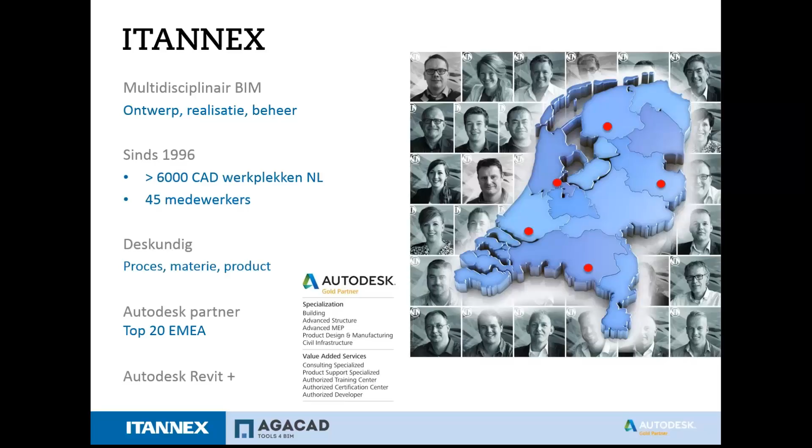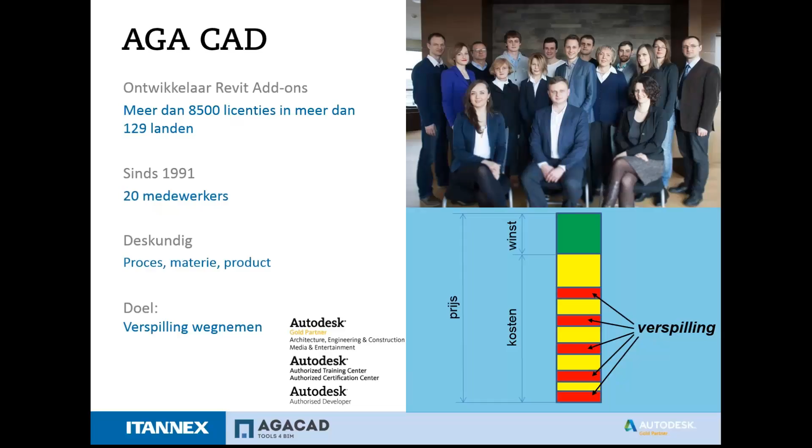AGACAD is een ontwikkelaar van Revit add-ons met meer dan 8500 licenties in meer dan 129 landen. AGA bestaat sinds 1991 en heeft meer dan 20 werknemers. Het doel van AGA is ervoor te zorgen dat u als gebruiker meer winst haalt uit uw workflow. Hiermee wordt ingezet op het versnellen van het proces en het wegnemen van verspillingen.

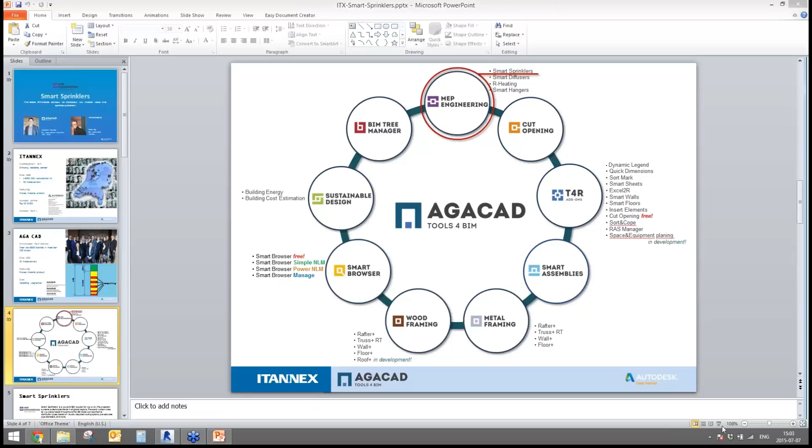Hello everybody, my name is Jacob, as Peter described me. So today we will speak about the fire protection design in Revit, and we will speak about the solution that is named Smart Sprinklers. As well, we have a lot of different stuff for diffusers, like for ventilation systems, heating systems, hangers, just from MEP side.

As well, we have the cut opening for cutting openings around the MEP line based elements where they meet something like walls, floors, and so on. As well, we have simple little tools that can increase your work productivity. As well, we have stuff for structural engineers, for wooden construction, metal constructions, and so on.

As well, we have the smart browser for browsing the libraries and inserting some kind of information inside of each family, not going one by one, but you can do that batched and so on. We have a sustainable design solution for calculation of heating and cooling loads and so on. As well, we have the BIM tree manager that can help you to manage your families inside of the project, not in your libraries.

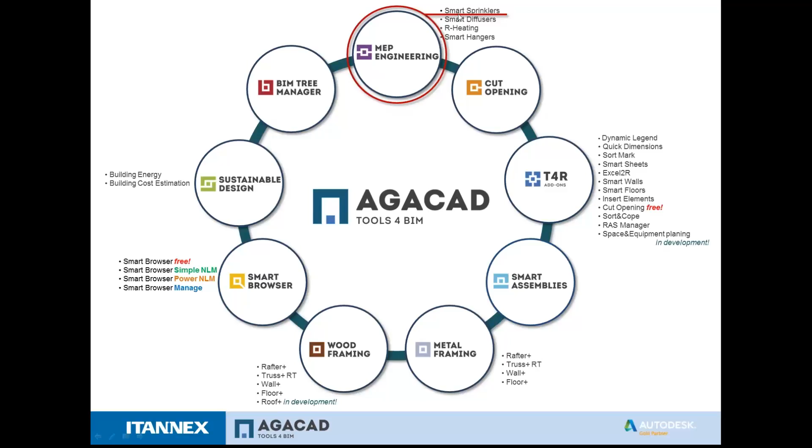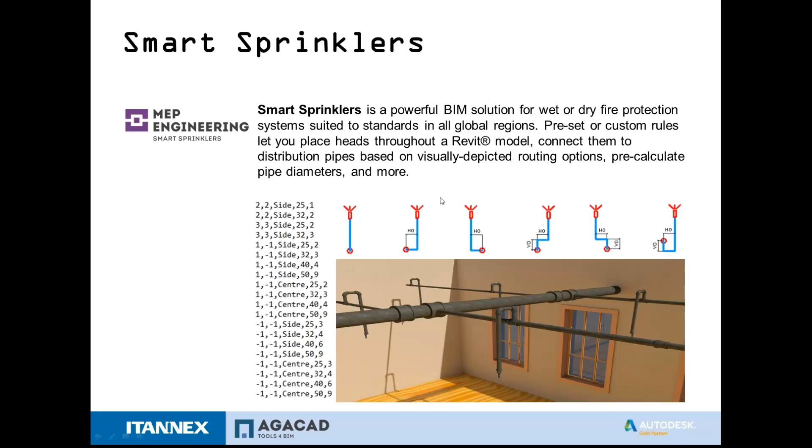So I just want to go to my Revit and try to describe everything to you straightly from my Revit. So what do I have here? I just have a simple Revit. So I want to make sure that our solutions work from the very beginning to the very end of your projects, and you do not need to do a lot of hard stuff to make configurations and so on. So I just simply open the mechanical template that is straightly in my Revit. And as you can see here, just on the right side, you can find the Tools 4 BIM Dock, and I will show everything from here.

So at the very beginning, what smart sprinklers can do is insert position symbols as a virtual group, and after that insert the real sprinklers to those position symbols. That means you can distribute your sprinkler elements in various geometries of the spaces.

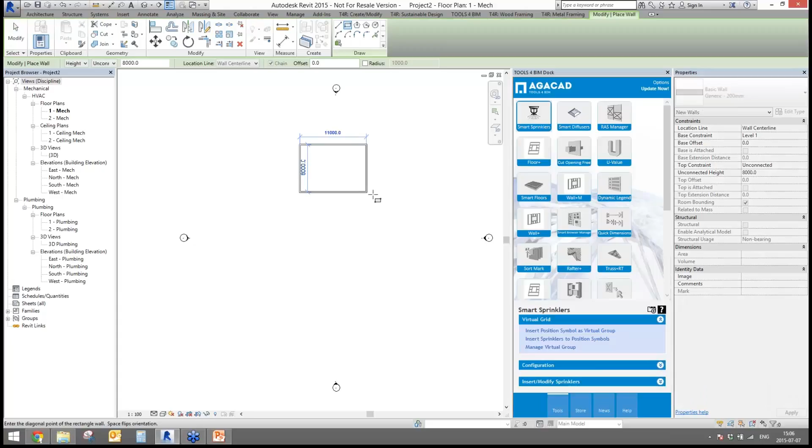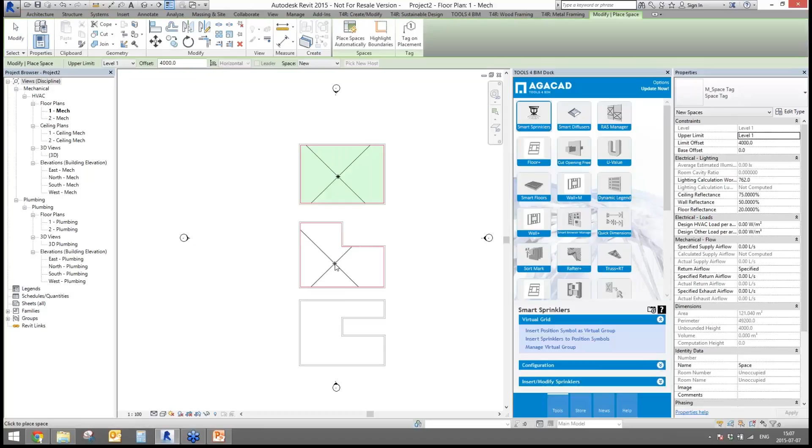For example, if I take the wall and draw something like a space right here, and another with different boundaries, different geometries, different space geometries. So for example, I have such geometries of the spaces.

I will just simply place the spaces inside of these premises, and go to the first step of the smart sprinkler solution. I will insert position symbols as a virtual group that will describe the connectivity between the real sprinkler and the space.

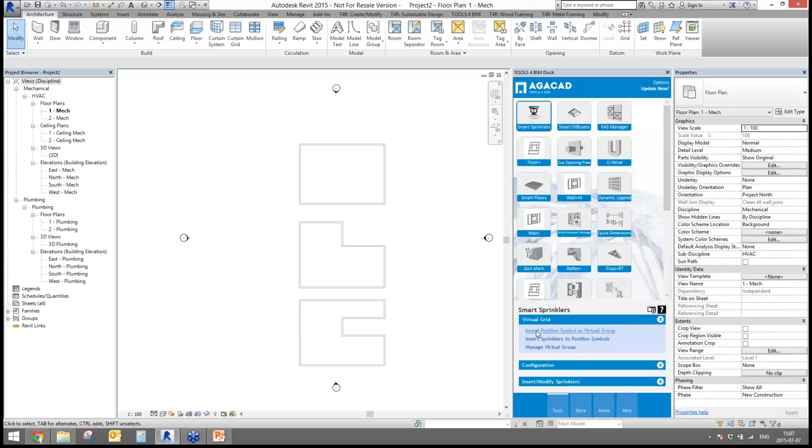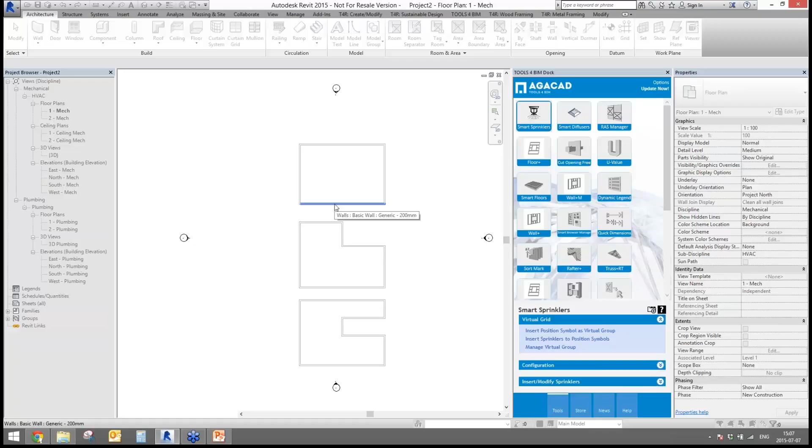After you click insert position symbol here as a virtual group, you have to click on something inside of the space. I will click right on the space, and the second click will show you where to find the x-axis according to which you will distribute all your sprinklers. I will take this one.

So here we have two very simple position marks, like symbols, that I will work with. I have a planning position mark for pendant sprinkler, so I will take this one, and here I have a really simple dialog box where you can find the length on X and Y directions.

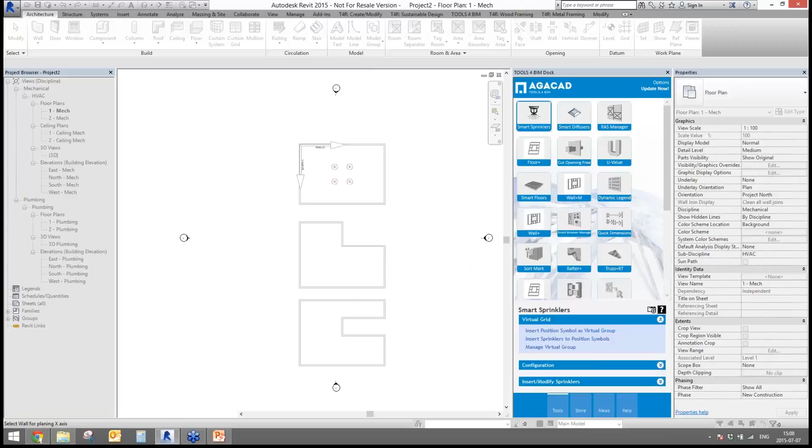As you can see here, we have new arrows that show you X and Y directions, so I am able to pick new distribution directions just by picking a new wall anytime I need. As well, I can identify the elevation of my position mark as well as the sprinkler position.

If you have something like compound ceilings, your sprinklers could be connected straightly to the ceilings and so on. Going further, here we have the distances on X and Y directions.

These two arrows show the X and Y directions, and here we have the distances between two sprinklers on X and Y directions. After I click calculate, it will calculate the number of elements on X and Y directions, and now I am able to apply everything, and you will see how it works.

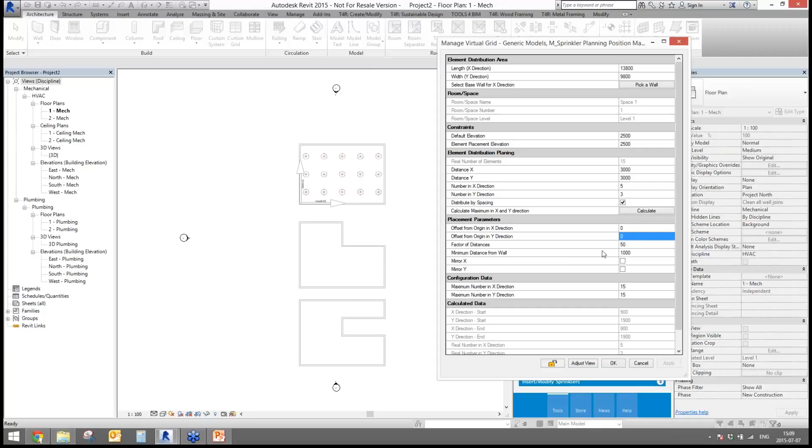As well, we have the offset functionalities, minimum distance from wall functionalities, and maximum number of elements in X and Y directions, and so on.

So as you can see, we have distributed just the position symbols, and I want to show you how it works with different geometries. I will do the same, just calculate, apply, okay.

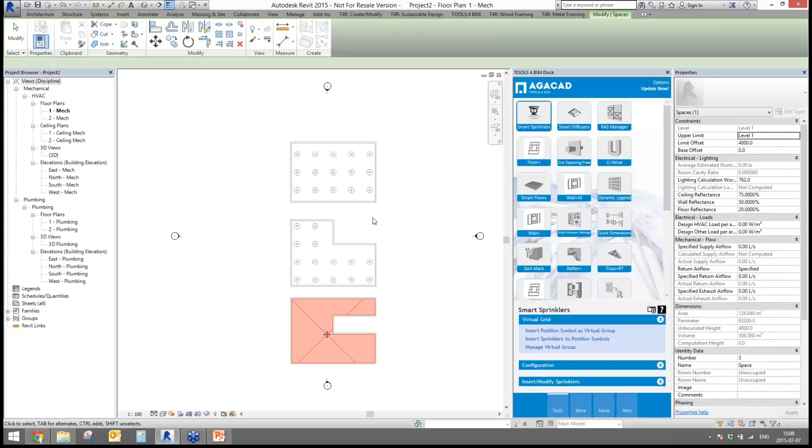It works like this. If I try to do with such a space, again I will take the x-axis, and again recalculate the number of elements, and it will distribute our sprinklers in accordance to such geometry.

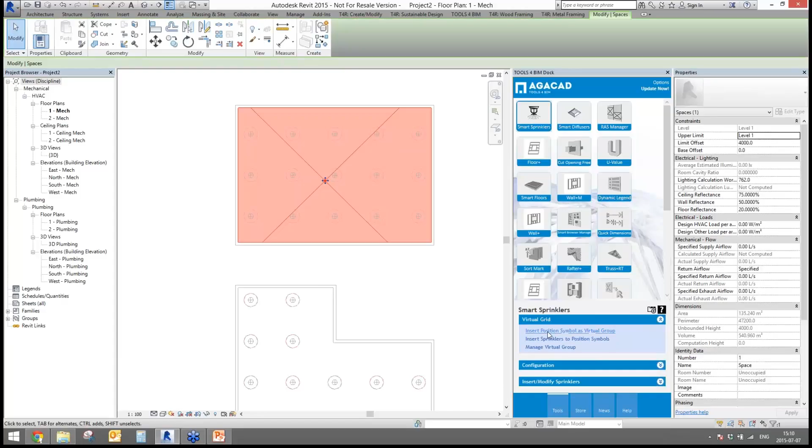After I click OK, here you can see that I have only the pendant position marks, so I am able to insert something like an upright position mark.

For example, now the default elevation will be a little bit different, like, okay, 3.5 meters and 3.5 meters. I will calculate everything, apply, and as you can see, they just popped to the same places as our pendant sprinklers were. If needed, you can add some additional offset to the X or Y directions, like this, and after this you can click OK.

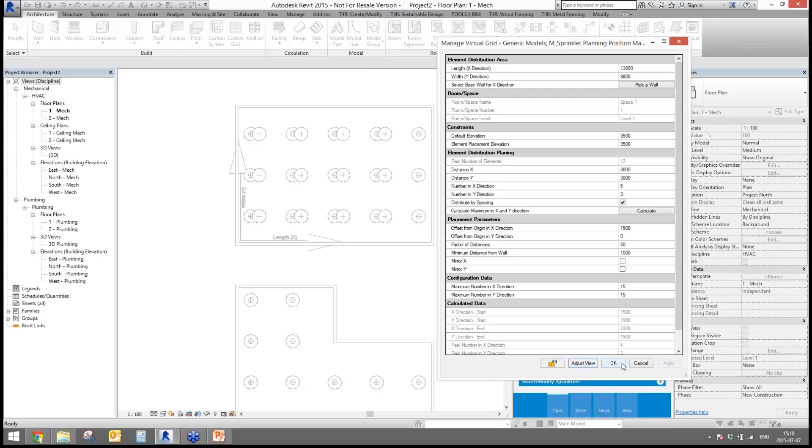So the next step, what we should do, because this is only the generic models, just the simple generic models, just for planning the positions of these elements.

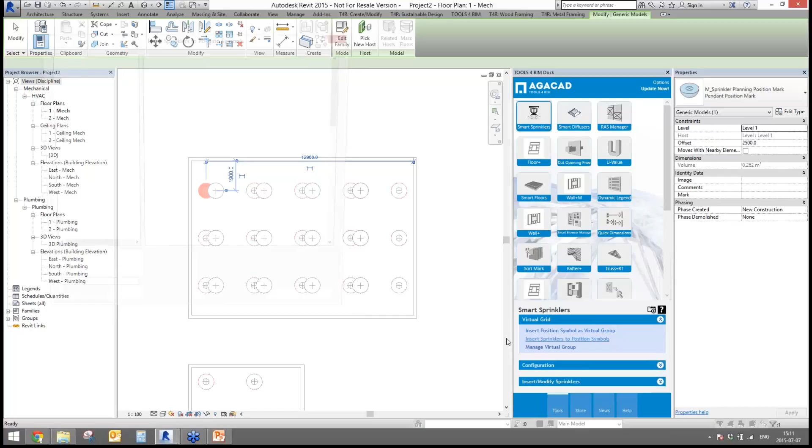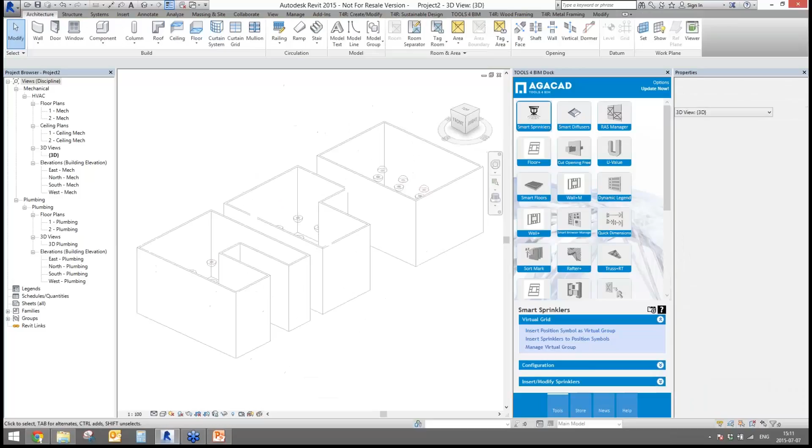So I'm going to select the pendant position mark, and I will go to insert sprinklers to position marks. Here you can find that Revit gives you some sprinkler families, like hosted families, but if you want to place the families somewhere in a space not connected to the ceiling, you have to use point-based families, like I said.

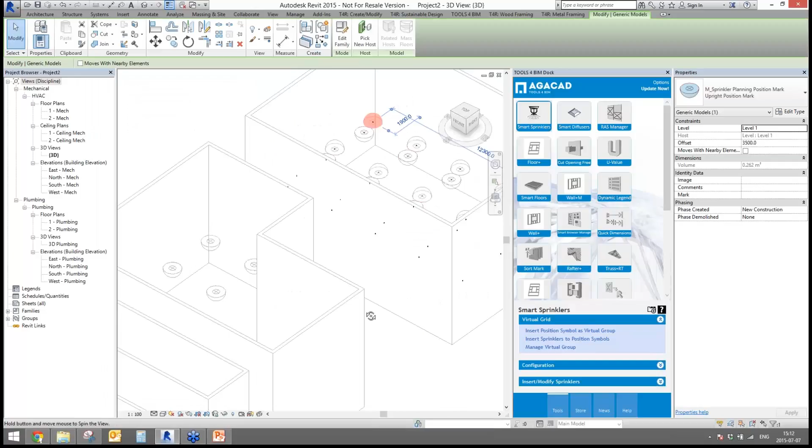So I just inserted those families, and I'm going to insert again for the upright. I'm taking this family, and I'm going to insert the sprinklers to the position marks for the upright, and you will see how they are distributed now.

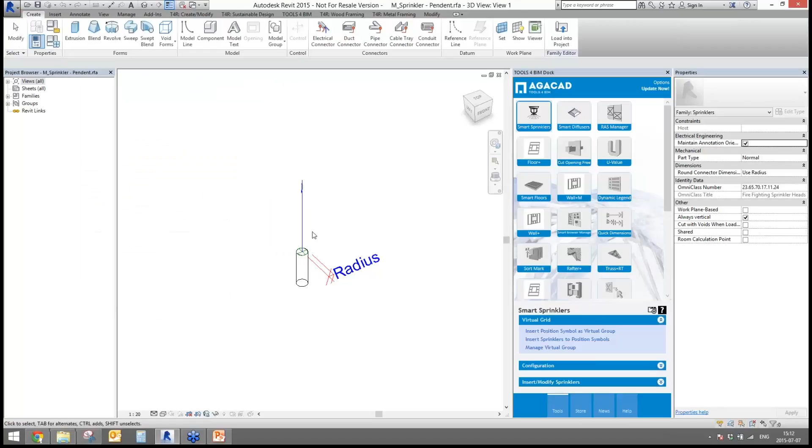I just want to mention that these families are very, very simple, and you do not need to create something special for that. They are working just like that. You have to create your just simple family, not a hosted family. And as you can see, I just distributed all the sprinklers in my building, in my space.

As well, I want to mention that the Smart Sprinkler solution works not only with regular walls, but it can work with, for example, linked files as well.

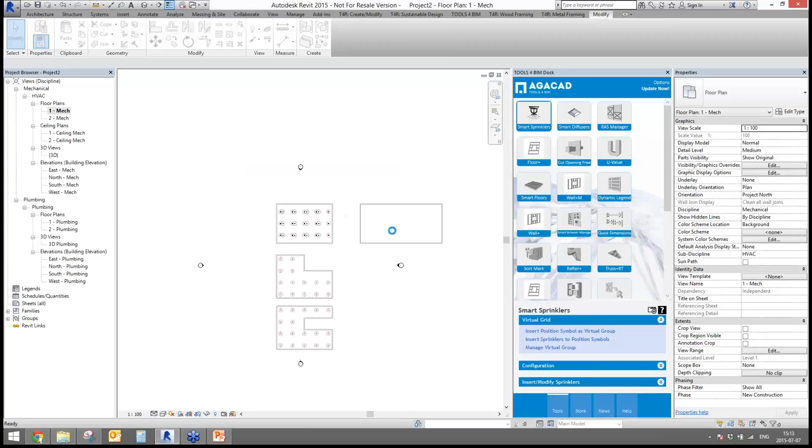So let's try to save this project and insert here the same sprinkler heads as we did just a few seconds ago.

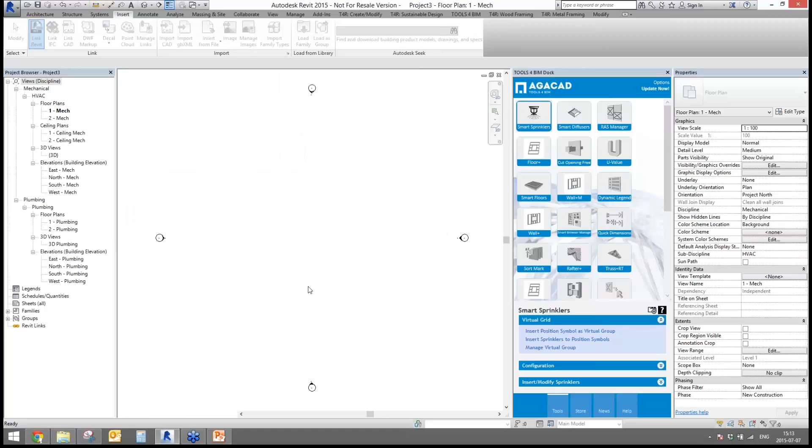So I'm just opening the mechanical template, and I'm going to insert link Revit with the same Revit file I'm linking that I just saved before. I have here the premises. So what should I do?

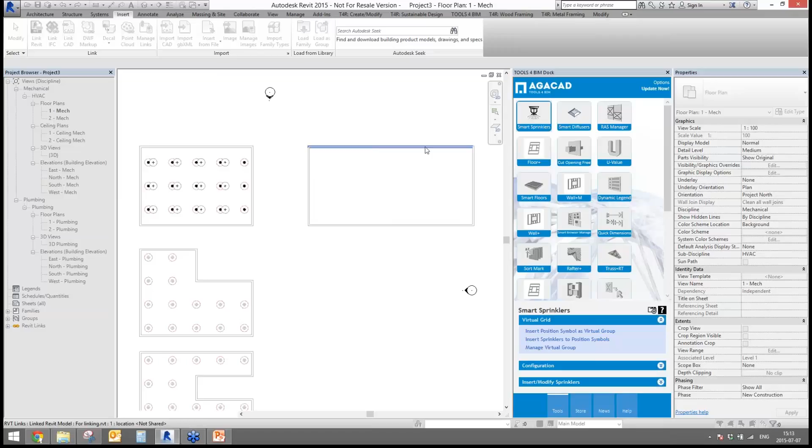I should just do the room bounding elements. I should place the space inside of my premise, and again I'm going to insert my position symbols as a virtual group over there. But as you can see, I can't take any of these walls, so you should press the escape button.

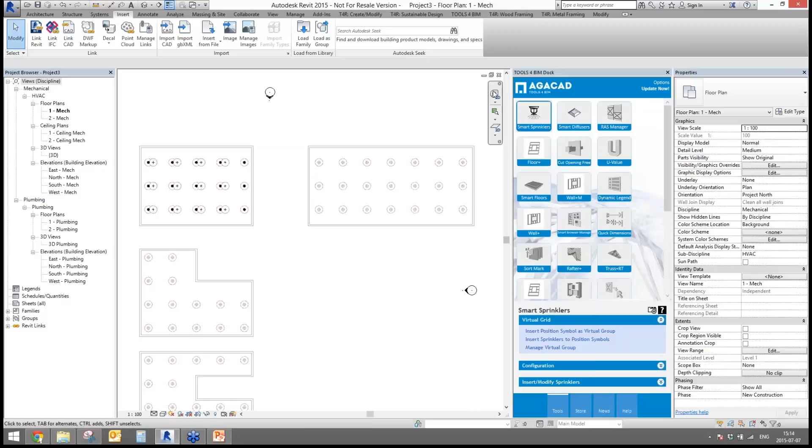Now we are able to take any of these walls for distribution. Again, we have the same stuff as before: calculate, apply, and we have all the stuff distributed over there. So after I click OK, we will have all the sprinklers, the position marks, like this. It's really simple, so I'm going back to the simple project to work further.

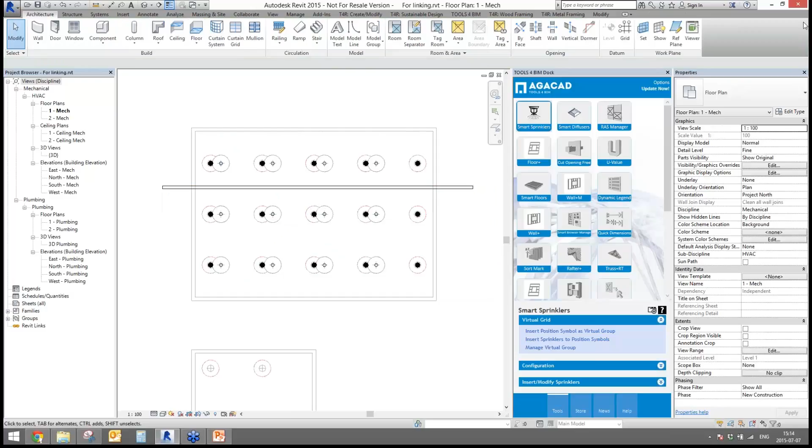I will try to work with these families that are placed over there. So I will place somewhere here the pipe. Imagine that this pipe is for distributing the flow into our sprinklers - this is, for example, the distribution pipe. As well, I will have the range pipes and the sprinkler pipes over there.

So I will duplicate, and I will use these pipe types. I will rename this as distribution pipe. I will take this and rename it as range pipe. As well, I will take this one and name it sprinkler pipe, for example.

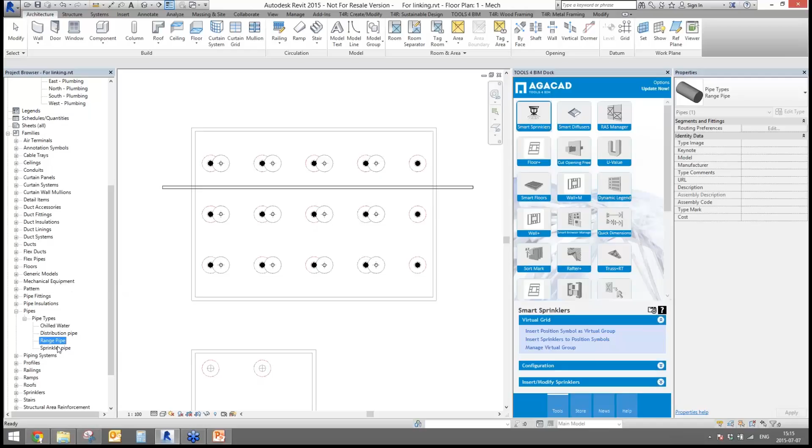So I have 3 different pipe types - I will use the distribution pipe right here, the range pipe right here, and the sprinkler pipe right here. But everything I will do using our solution, our smart sprinkler solution.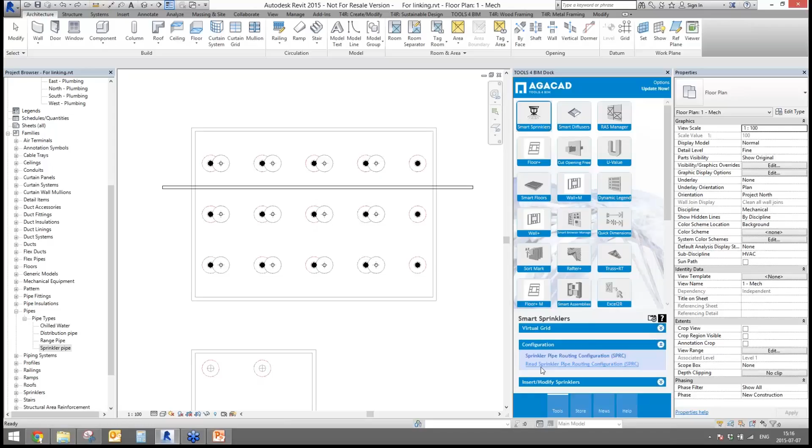At the very beginning, when you start the work, you have to think about some kind of routing configurations - but not the same routing configurations that come from pipe routings that are placed here. There you can define your elbows, T's, junctions, crosses, and so on. But you have to think as well about the configurations from smart sprinklers.

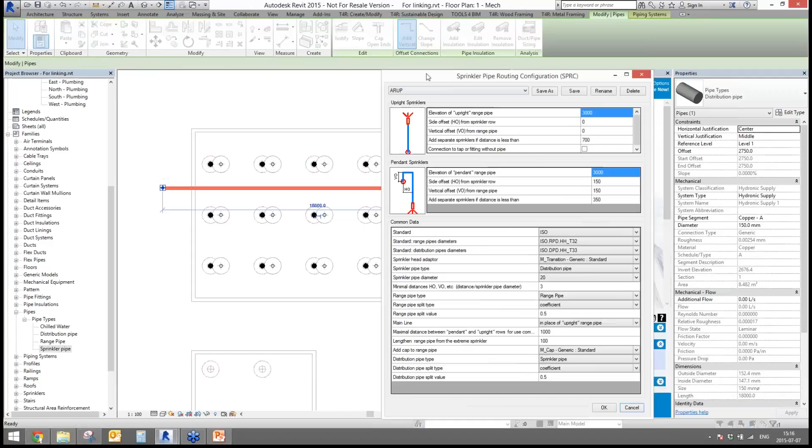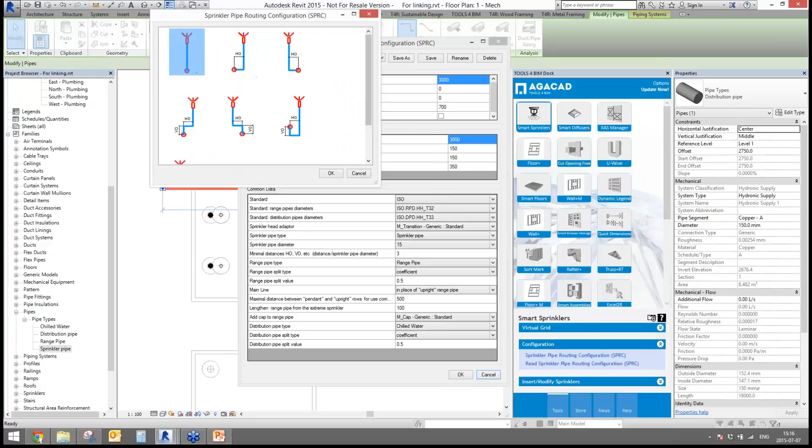So I'm going inside, and what do we have here? We have these connections, for example, for any type of sprinklers. I have the upright and pendant sprinklers, so I have to identify what kind of connection I want to use for the upright sprinkler, as well as identify the connection for the pendant sprinkler. I'll take this one or that one, it doesn't matter. I also have to identify the side offset that is here and the vertical offset that is here.

Now the solution will use some kind of pipe routing preferences from Revit, and it will make something like this - it will make the connection from the sprinkler head to the range pipe, the sprinkler pipe, like this.

As well, if you go further, you will find some standards for the diameter pre-calculation. Our smart sprinkler solution could pre-calculate the diameters of distribution and range pipes. So how does it do that?

You have to identify what kind of standards you will use, and I just want to show you how the standards look like. Here is a simple text file that shows our Revit what kind of pipe type, what kind of pipe size it should use. So for example, if we have only one sprinkler connected, we will use 25 diameter. If we have 2 sprinklers, it will use something like 32. If we have 9, we will use 50.

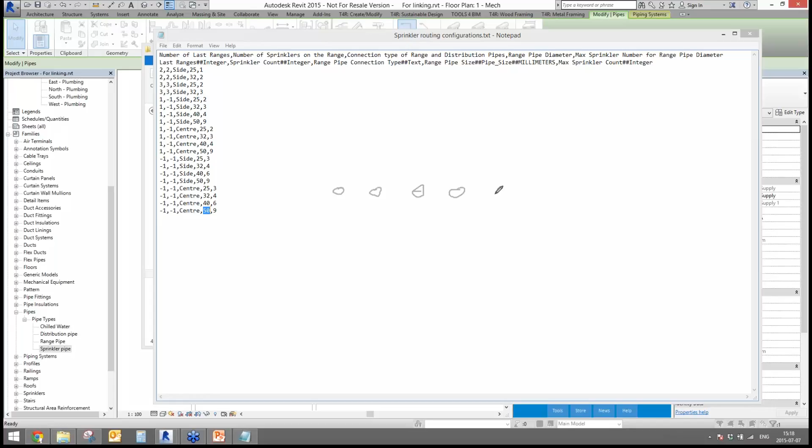So I will just simply draw that. I have 1, 2, 3, 4, and 5 sprinklers. Here I will use 25 diameter, here I will use 32 for example, here I use it as well 32, here I will use 40, and here I will use 50 diameter. So it's really simple.

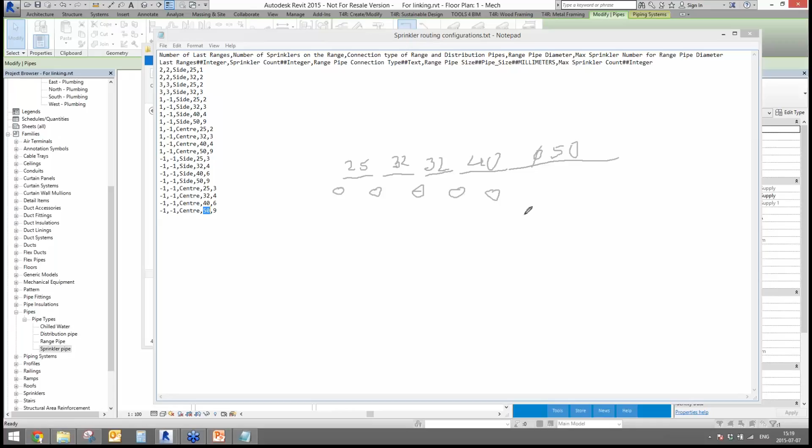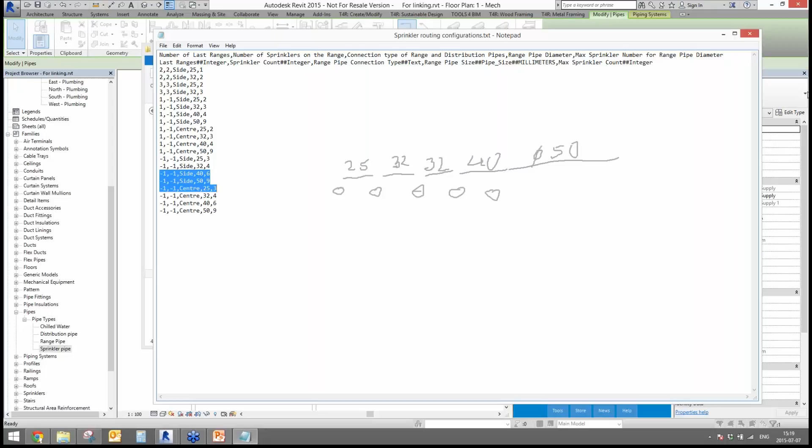So you can create your own standard - not exactly a standard, but your own text file - and you can choose that file straight from the files. You have to place those text files over there, and according to this, your smart sprinkler solution will know what pipe size it should choose.

As well, you have to identify the sprinkler head adapter - for example, it comes from the project. As well, you have to identify the sprinkler pipe - for example, I will use for the sprinkler pipe type the sprinkler pipe. As well, you have to identify the range pipe type - you take the range pipe, and here for the distribution, I will take the distribution pipe.

As well, you have to identify the sprinkler pipe diameter, which comes from the flow of the sprinkler. So you should know the coverage area for distribution, as well as the sprinkler pipe diameter.

After the solution, we will calculate how to change the diameter of your pipe. We will have something like the split element inside, so we have to identify where to split our pipes according to the coefficient or according to the distance from the very first pipe. For example, the coefficient 0.5 stands for the very middle point in between two sprinklers where you should change the pipe.

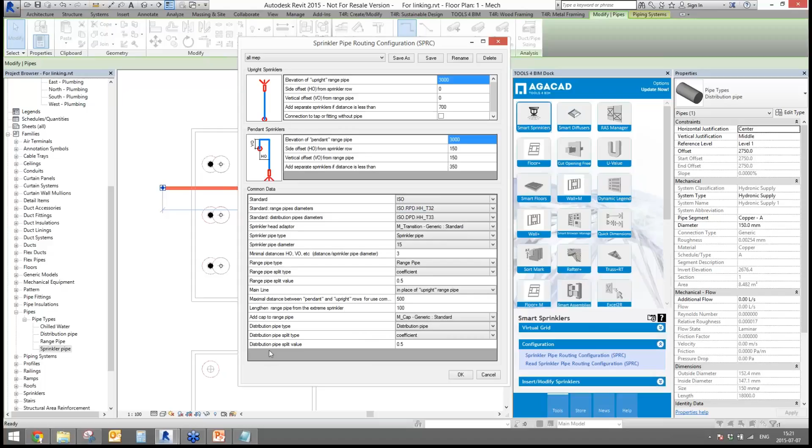So after everything here will be like described to the solution, you can click OK and you can go to Insert Modify Sprinklers and try to connect sprinklers to the distribution pipe. So here you have to identify the sprinkler in the space and the pipe, and it will automatically connect everything here.

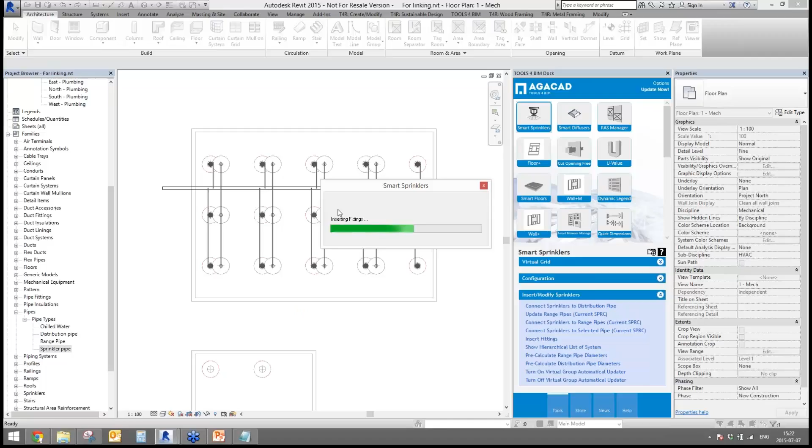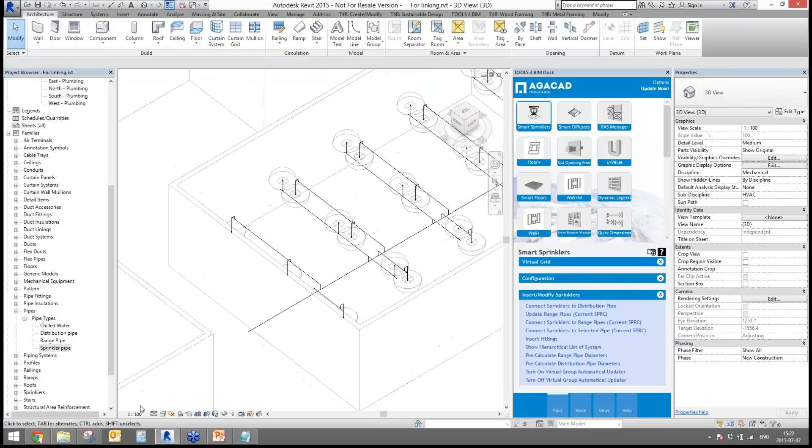So it is inserting the fittings, it is inserting everything what you need. Let's check from the 3D view what do we get here. I will try to decrease the elevation of this space just to see everything, and I will increase the visibility. So what do I have here? I have the upright going pipe, so I have the pipe over there.

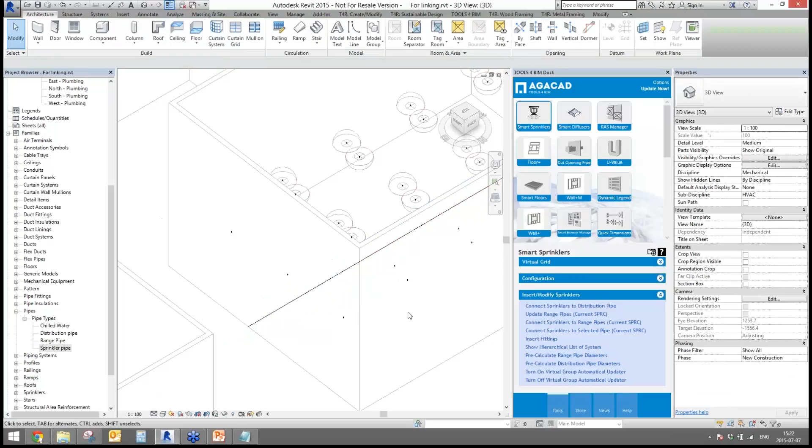Let's change a little bit. I will move upright, for example, to the 3 meters, and again we will be able to try to do the same. So for example, I can measure the distance in between these two elements. I have something about 600. I have 3 meters here. I have my sprinkler configurations 3 meters and 3 meters. As well, I have the maximum distance of 500. I will change that to 1000.

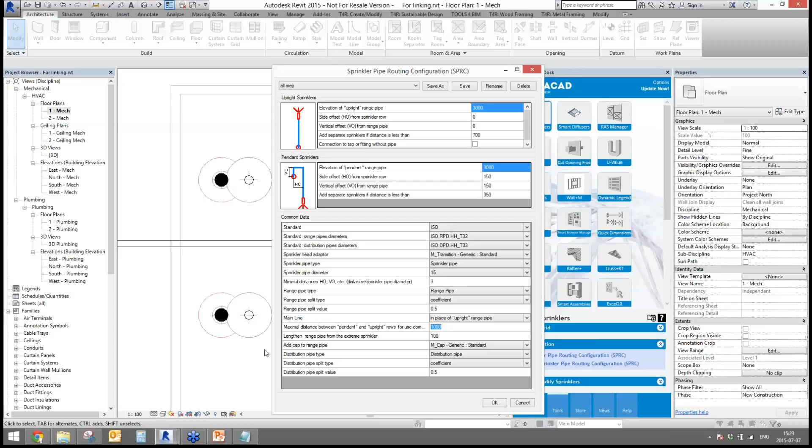That means I will basically use the main line in place of upright instead of using two separate pipes. But if the distance in between these two sprinklers will be more than 1000, it will use two separate lines. Let's try again, and I will connect the sprinklers to this pipe. Now you will see that it is inserting only one pipe type, one pipeline, and it is connecting the upright and pendant sprinklers only into the one pipeline.

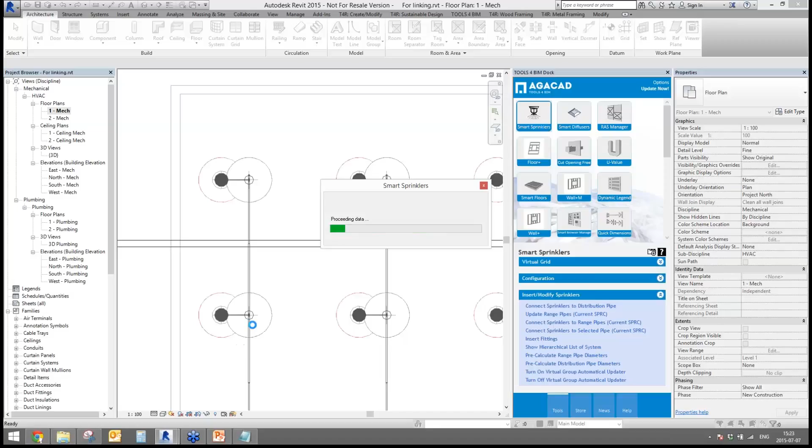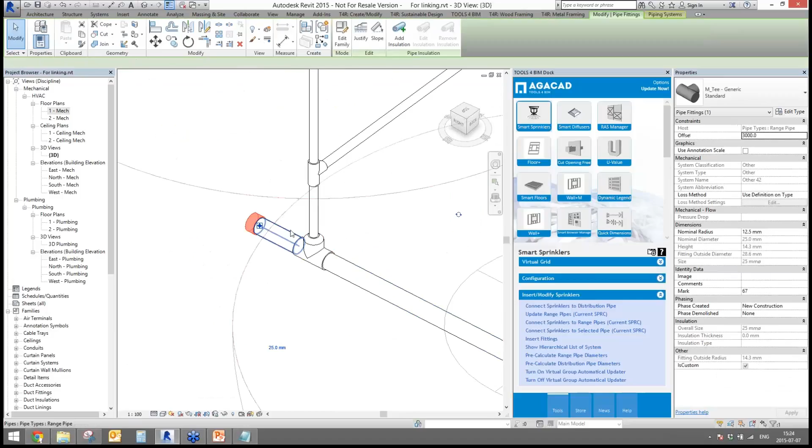Let's go to the 3D view, and again I will try to do the same. Okay, let's check what we have here. As you can see, it inserted all the fittings, all the caps, all the lengthened pipes. It inserted all the T's, elbows, and so on. So it is taking the information about the pipe from the routing preferences from Revit, and it is taking the connection geometry from our smart sprinkler solution.

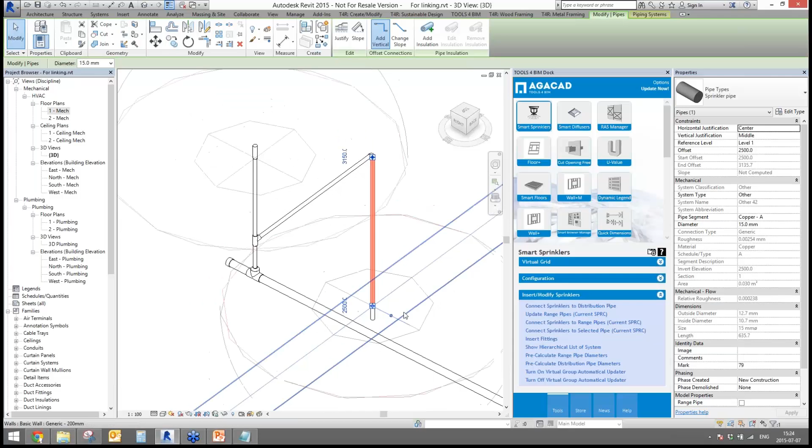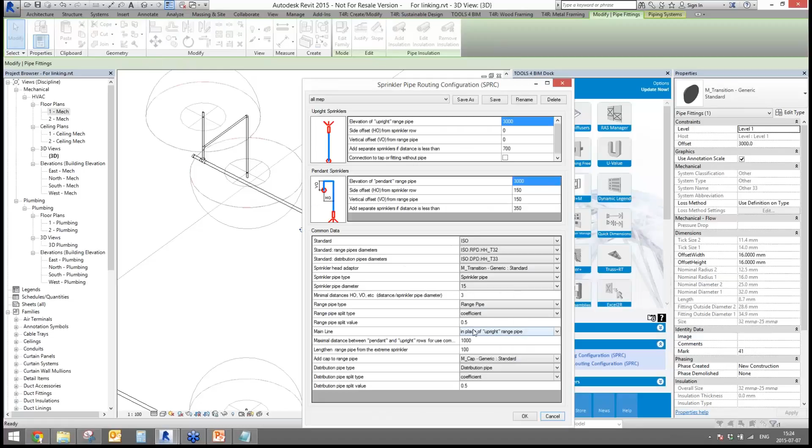So what we get here, you can easily see. Just here in the middle, you can find the transition that is in the very middle in between these 2 points. So I just identified that I need to split the range pipe by the coefficient 0.5, so it split my pipeline just in the very middle.

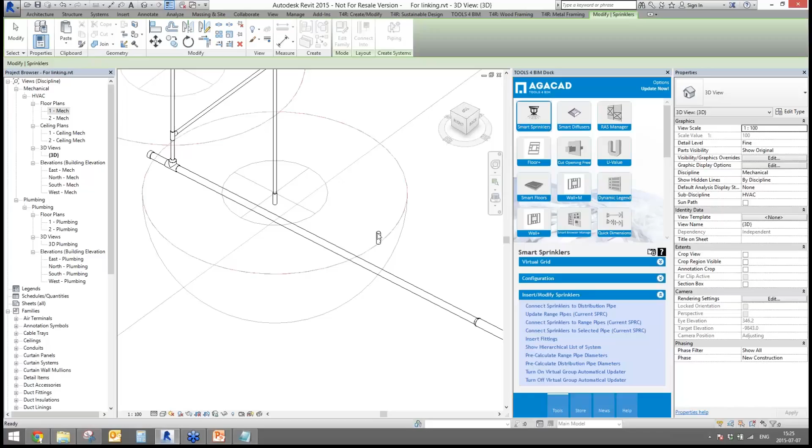As well, if it's needed, I can anytime copy my families, and I'm still able to use the functionality of the smart sprinkler. So I could do that manually, but as well I can just take the family and try to connect the sprinkler to the range pipe simply. And as you can see, it just does all the stuff instead of you. So you will never need to do that manually again.

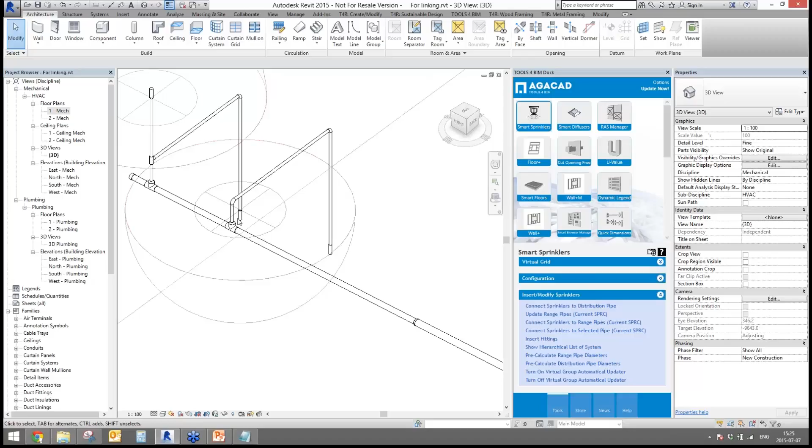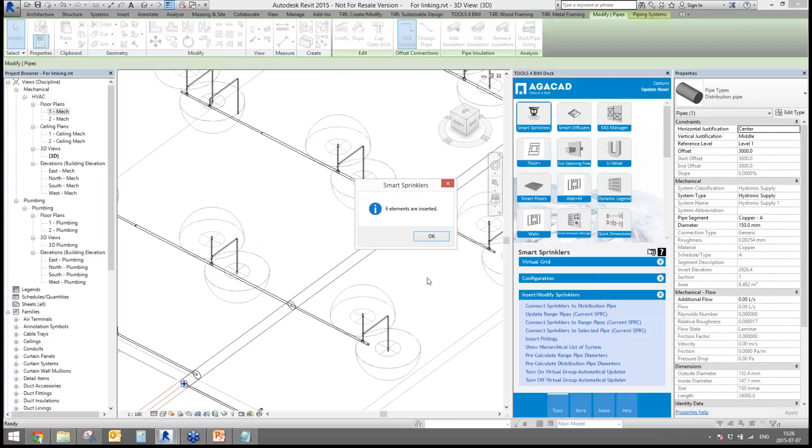Instead, you will need something like the flex pipes or something like this. As well, after this, you can find that the elements here have no connection, so we have invented the insert fittings functionality, where the pipes meet each other they insert the fittings. In our case, they inserted something like crosses. Here they inserted T's and so on.

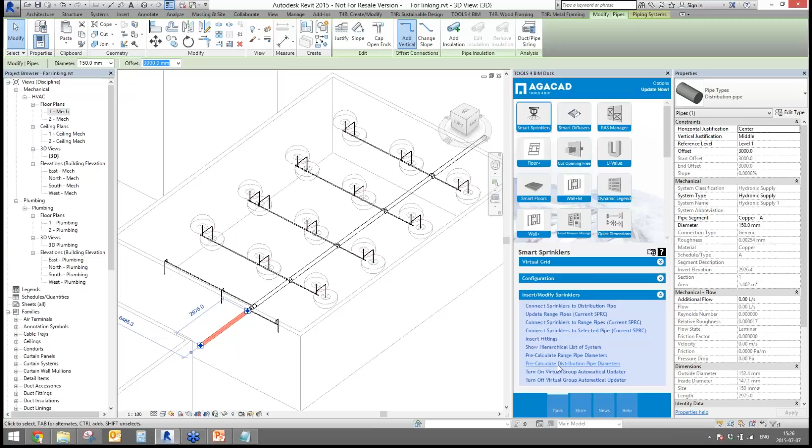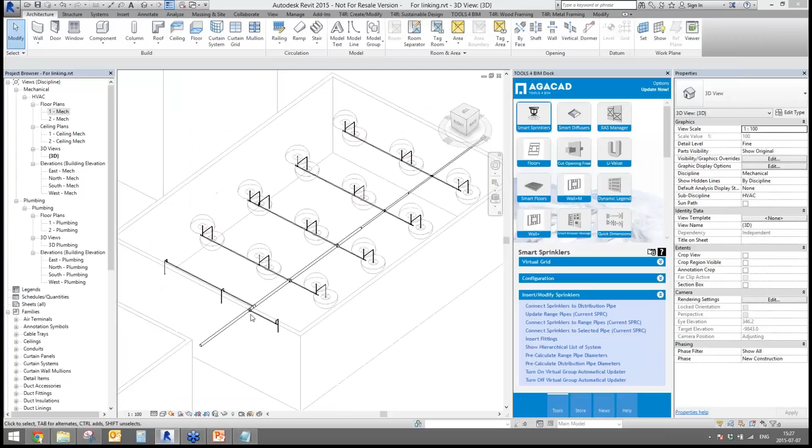After all the families are distributed, all the pipes and sprinklers are distributed, you will be able to pre-calculate the range pipe diameter as well as pre-calculate the distribution pipe diameter. So if I click on that, and say that this is the starting point, it will go through all the pipe, and it will calculate again by the same rules of the text files that we have, sprinkler routing configurations. And as you can see, it changed the diameters.

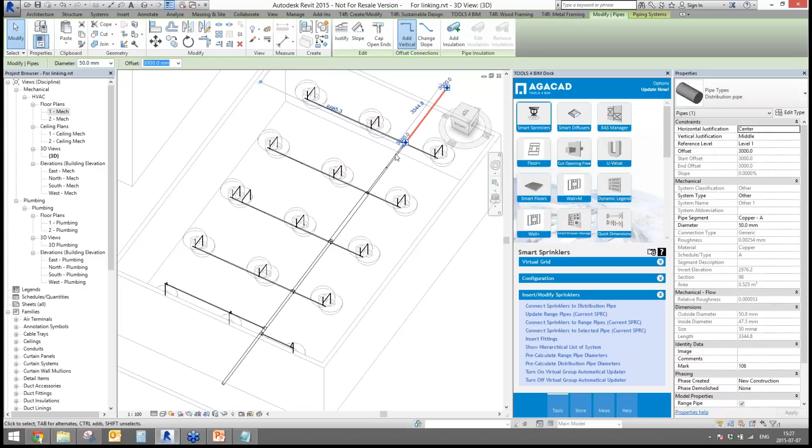Here we have the diameter of 100 millimeters, and here we have only 65. Here we have as well 65, and here we have 50, and here we have 50. So it is really nice because it is calculating the number of elements connected into the system, and it is pre-calculating the diameter of our pipes. So if it is interesting, you can check the hierarchical list of the system, how the system is connected. For example, if I'm going like this, I know that the very first pipe is this one.

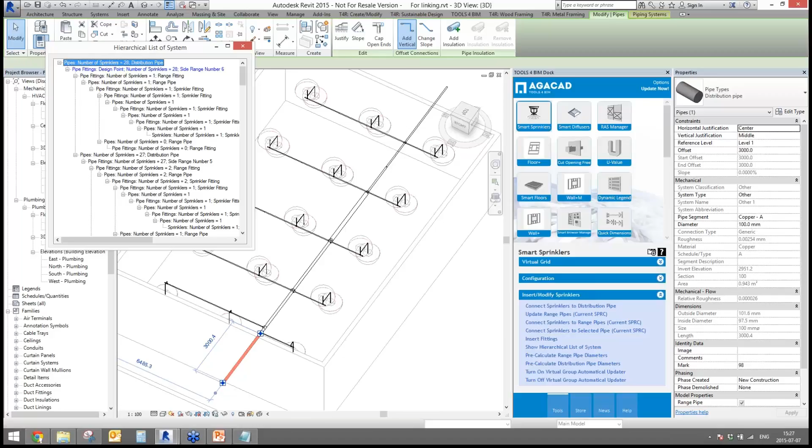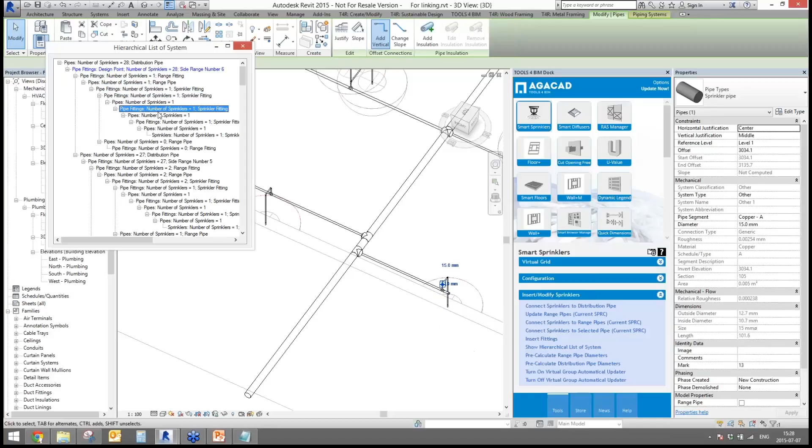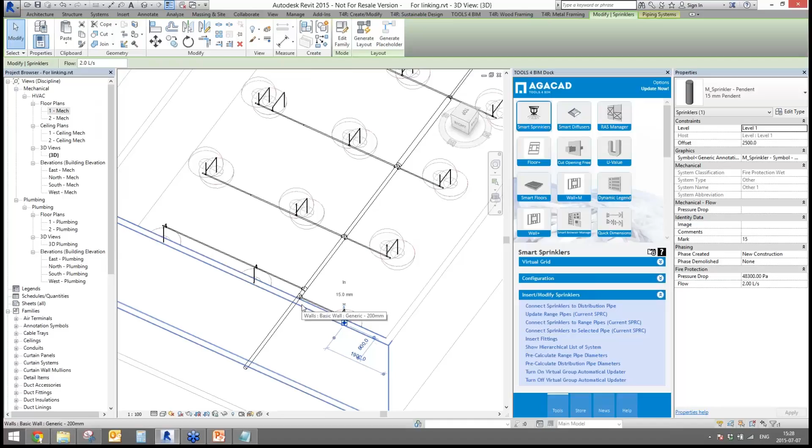If I'm going further, I know that here I have something like this element. After I have the transition, after I have the pipe, here I have the T, transition, pipe, and so on. So you can find the hierarchy list, how your families are connected one by one, and how they are dependent on each other. So the calculations are basically made according to such hierarchical list.

So, Peter, from my side, that is all, and I want you to connect back to the web session. Could you?

Sorry, I'm not sure what you're asking. No, I'm not asking, I'm saying that I finished. So I showed everything our smart sprinkler solution could do - not everything, but just the basic steps.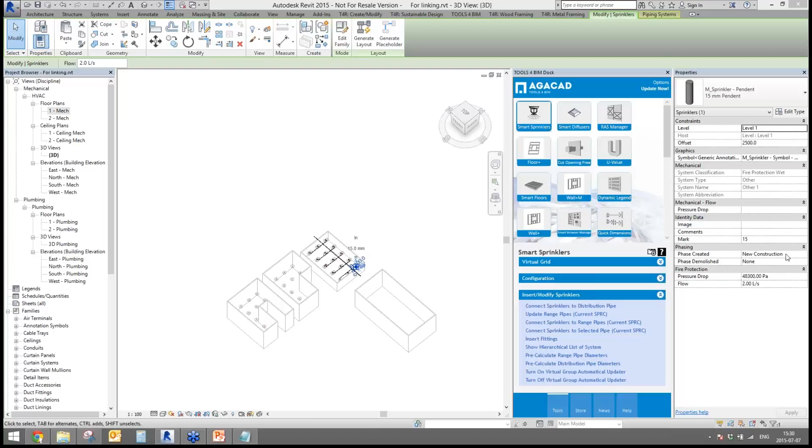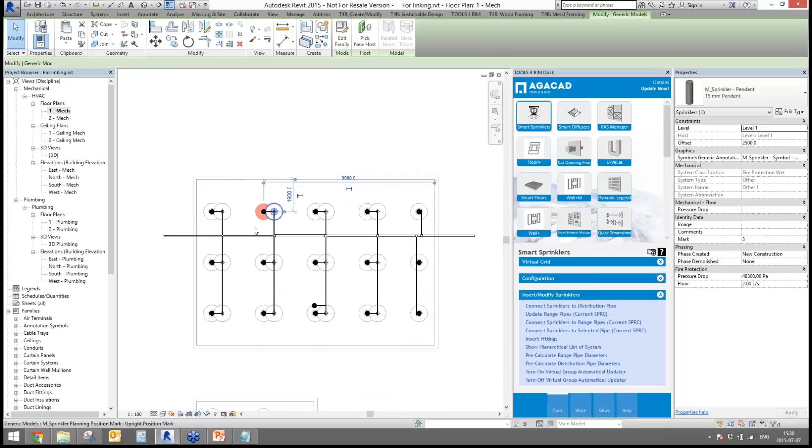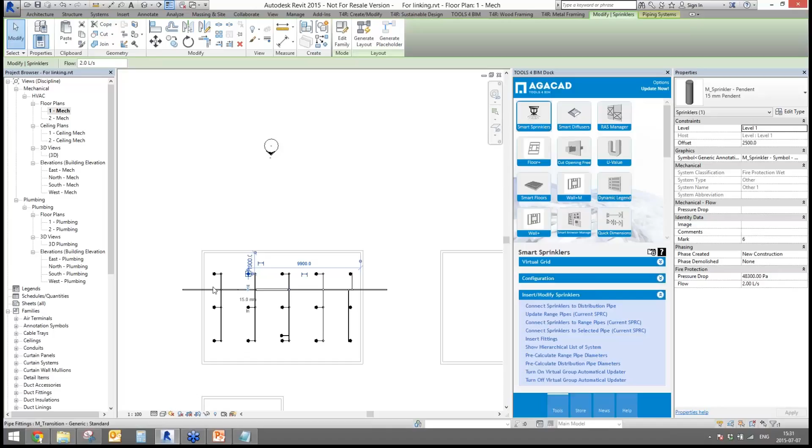Okay, I see the question Paul is asking. I hope it's about 2D and 3D symbols. If you go just here, you will see that all this symbology comes from the families that you create. If you are speaking about these position symbols, if you don't need them you can just delete that, because that stands only for distribution of elements in your building - as in simple Revit, it has some kind of graphical representation of any pipes and so on. So the same is here, and I can use the course function to have everything over there like this.

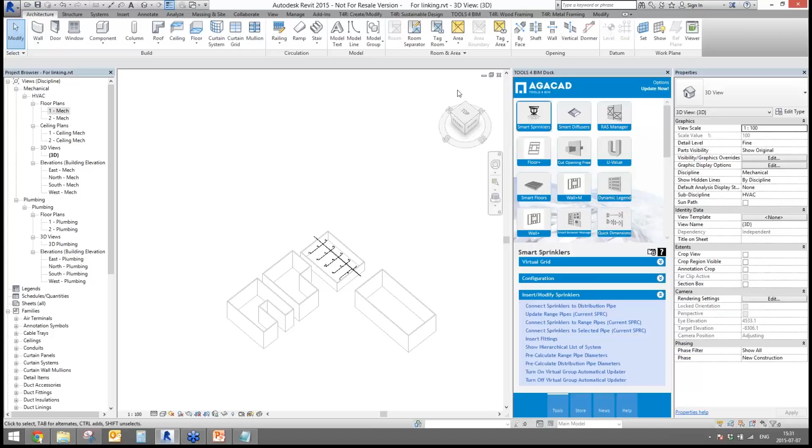We also have a Dutch question - Christian is asking how the systems will be connected to the floors above. The systems are not connected basically to the floor above, but you can try to do that manually, I think.

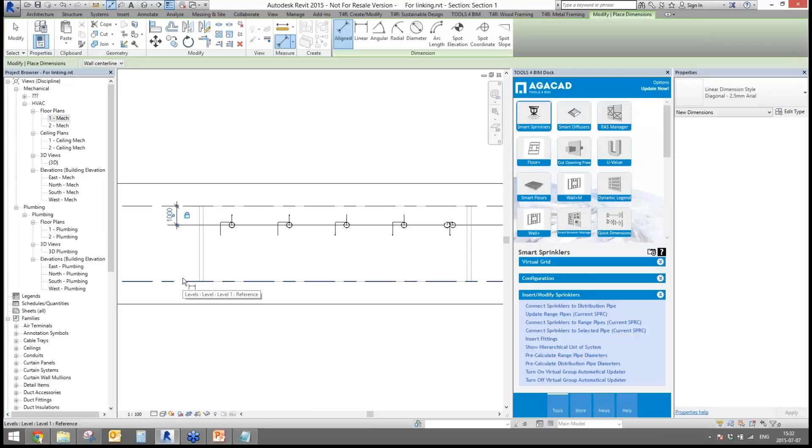If we try to make something like a section over there, go inside, and try to place something like a ceiling, we should be able to connect to the upper stuff - if I move something here, everything should move together, like you can see. So I think they are just unconnected right now, but if you try to connect that as in simple Revit, they will be connected as well.

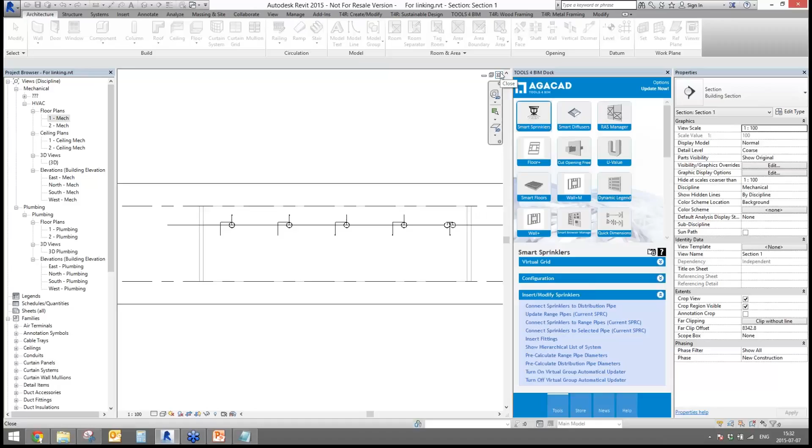Yes, but that's another tool. I think yes, we've done one already, there was one time a webinar about it.